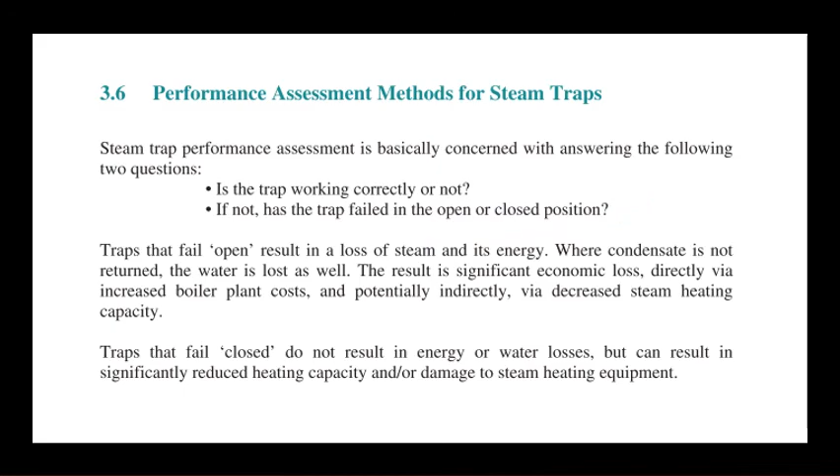Now there are different types of testing which can be done to check whether the traps are performing well or not. In the exam, they ask you to name the three types of testing done to assess the performance of the trap, or whether it is working or not. They may ask you to only name the types of testing, or to explain them, or they may give you the names straight away and ask you to briefly explain the testing method, friends.

So the first one is visual testing. By the name you can understand that you do the testing of the steam trap with the help of your sight, friends. With your expertise, you can sense whether the steam trap is properly working or not, and find out the problems in the steam trap. But it's not so efficient a method, because it doesn't give you a concrete result, and it's not feasible enough to rely on this type of study alone, friends. It's a part of the method where visual testing is used to identify the performance of the steam trap, or whether it is damaged. So visual testing is one of the methods. Everything is written here, you can go through and understand it yourself.

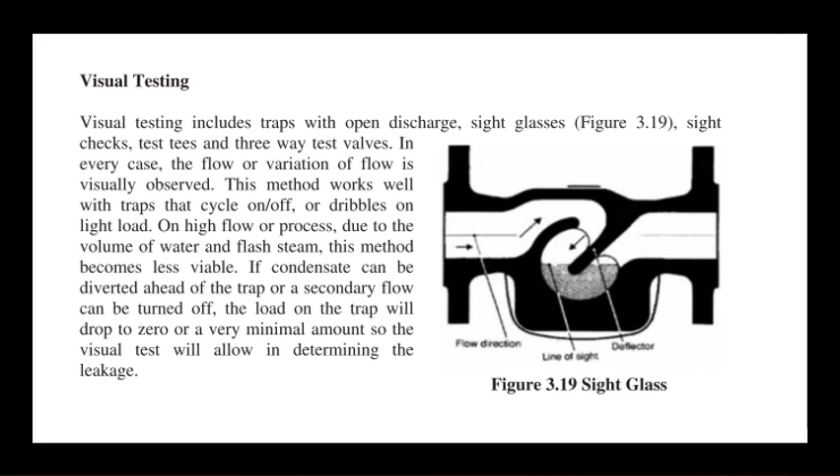This is another type of testing, friends: the sound testing method, by which you can also check whether the trap is performing well or not, or if it is damaged. Sound testing includes ultrasonic leak detectors and other equipment to check whether the trap is performing properly, or whether it is damaged completely. A lot of industries use this method to check the performance of steam traps. The explanation is given here, you can go through and understand yourself. In the exam, if they ask you, you must be able to briefly explain the sound testing method and the visual testing method explained in the last slide.

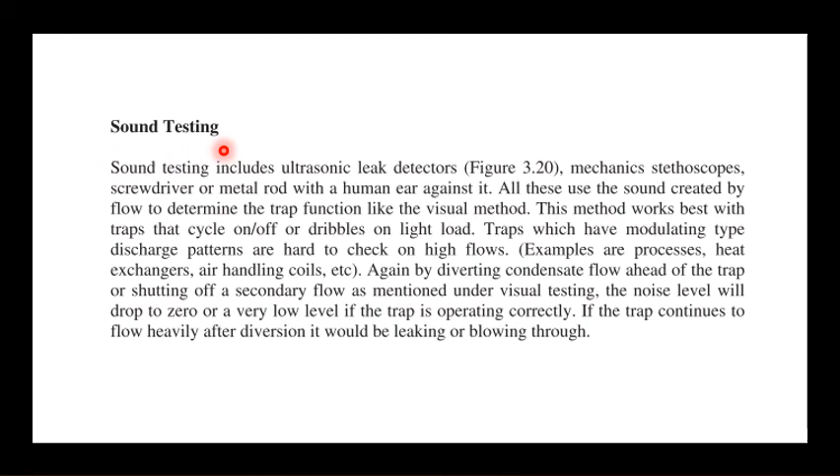This is another type of testing, friends, called temperature testing. Basically, you use a temperature gun, or infrared testing equipment, to check the temperature of the steam trap from outside, or the outlet side of the trap, and then analyze whether there are leakages going on inside the steam trap. So you can easily perform the assessment of the steam trap, whether it's performing well or not, or if there is a gap or damage, with your expertise.

So this is the third type of checking or performance checking of the steam trap. The visual type is one, second is the sound type, third is the temperature testing method. These are the three methods used to test the performance of steam traps, to know whether the steam trap is performing well or not, or if it is damaged. These things have to be analyzed using these three testing methods, friends.

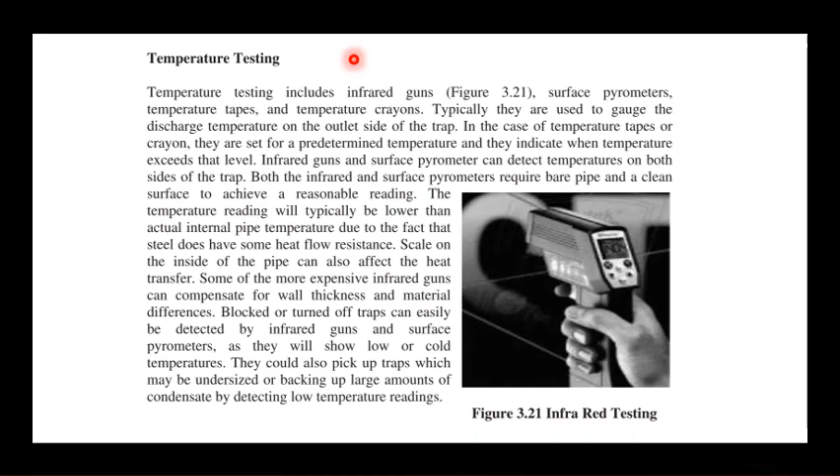Now coming to efficient steam utilization and energy saving opportunities. There are different types of methods, or saving opportunities, where you can use those applications and save a lot of energy in the steam distribution system, friends. The first thing is the monitoring of the steam traps.

That's what I said in the last slides also. Steam trap assessment and monitoring is very much important from the energy conservation point of view. If you want to conserve energy, you need to regularly monitor the steam traps, whether they are performing well, if there is any damage inside, or if you need to replace the trap. All this has to be analyzed and continuously monitored, and if any damage is there, or performance is not as per standard, you have to replace the steam trap accordingly. So this is the first energy saving opportunity: to monitor the steam trap on a regular basis, friends.

Suppose there is continuous steam blow and no flow indication - this means there is a problem in the trap. You need to analyze the steam trap from time to time. A step-by-step analysis is required, and you need to observe the discharge from the trap to understand whether it is performing well or if any problem is there. If continuous steam blow is there with no flow indication, some problem is happening inside the trap, and that has to be analyzed to conclude whether to change the trap or not, because otherwise a lot of energy losses will occur. Proper step-by-step analysis will lead to concrete action, and then you can save a lot of energy. This is the second energy saving opportunity in the steam system, friends.

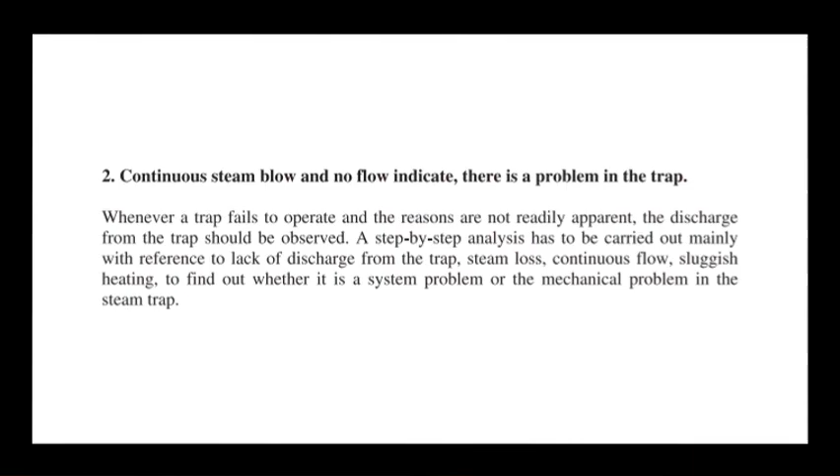The third energy saving opportunity is avoiding steam leakages. You need to take care that there is as minimum as possible steam leakage in the steam distribution system, friends. Steam leakage is a visible indicator of waste and must be avoided. Any leakage happening on the equipment side, or the steam distribution side, has to be curtailed or addressed, and you need to keep in mind minimum steam leakages should happen inside the plant premises, friends.

It has been estimated that a 3 mm diameter hole on a pipeline carrying 7 kg per centimeter square steam would waste 33 kl of fuel oil per year. You can see how much steam can be wasted with only a 3 mm diameter hole on a pipeline. You need to address all the holes, all the leakages, wherever they are. Avoiding steam leakages will lead to a lot of energy saving for sure. This is the third opportunity for energy saving or energy conservation in the steam distribution system, friends.

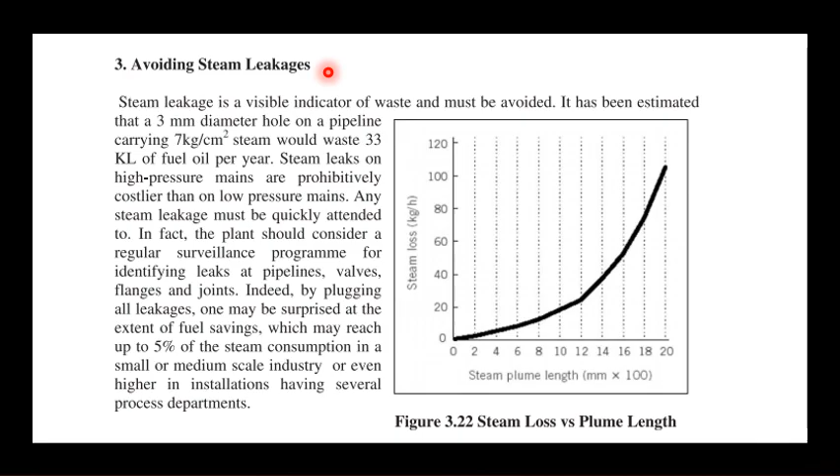Now the other opportunity is providing dry steam. You should consider dry steam for the process, not wet steam. If you use dry steam, you'll have a lot of energy saving potential. Best steam for industrial process heating is dry saturated steam. So you must keep in mind that the steam used in the processes should basically be dry saturated steam.

The wet steam reduces the total heat in the steam. So basically if you use dry steam, you'll have more energy conservation opportunity. This is the fourth type of energy conservation measure that can be taken to save energy, friends. Providing dry steam for the process is the fourth energy conservation opportunity in the steam distribution system.

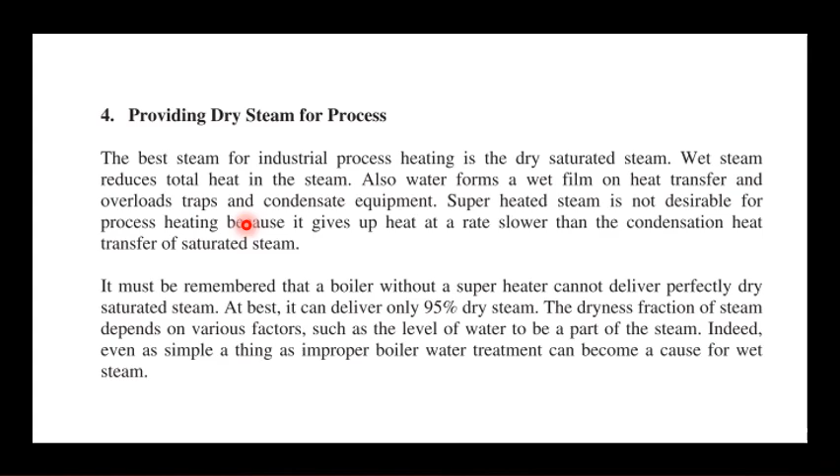Now the fifth energy conservation opportunity in the steam system is utilizing steam at the lowest acceptable pressure for the process. What is to be understood here? As a guide, steam should always be generated and distributed at the highest possible pressure, but utilized at a low pressure.

So if you generate the steam, you can generate it at a higher pressure and also distribute it at a higher pressure. But when you are going to utilize it in the process, keep in mind to have a pressure as low as possible, since it then has higher latent heat. So latent heat will be utilized in a better way if you keep the pressure as low as possible. This is the fifth energy conservation opportunity inside the steam distribution system, friends.

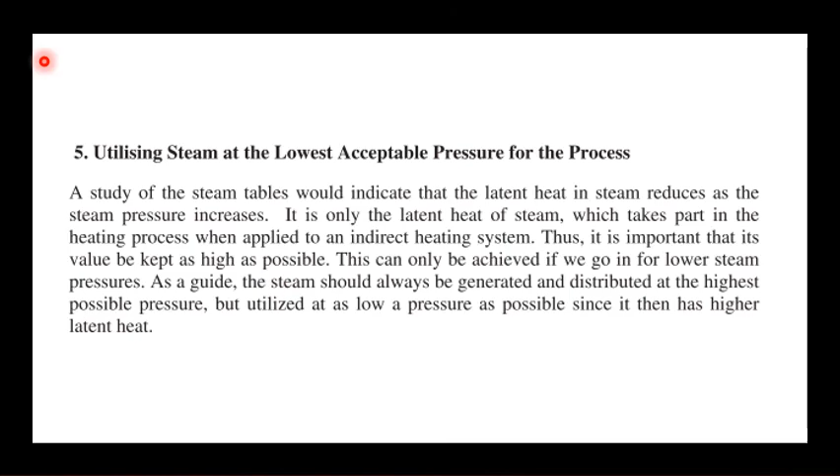So the sixth point is the proper utilization of directly injected steam. Basically, any liquid that you want to heat, you can directly inject steam inside it and heat the liquid in a very efficient manner. In this case, the only problem is that the liquid should not be diluted by the steam. So steam should not mix up with the liquid.

So in processes where dilution is not a problem, heating is done by blowing steam into the liquid. So any liquid where the steam will not mix with it, you can use steam directly, injecting it straight away to heat the liquid. Heating of a liquid by direct injection of steam is often desirable. For processes where dilution is not a problem, you can use this method to heat the liquid, and it's a very efficient method where a lot of energy can be conserved.

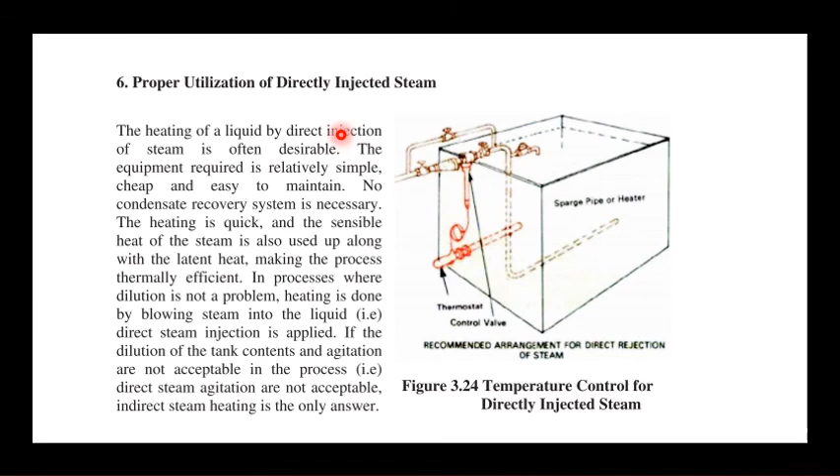Because you're directly injecting steam inside the liquid, you need not use any other mechanism here for heating it. So you can see that proper utilization of directly injected steam will help you save a lot of energy, friends.

Now the seventh point is minimizing the heat transfer barriers. You can already understand this from the name itself, so I'm not going to explain it in detail. You can understand by the heading that you have to minimize the heat transfer barriers. Any barrier that prevents proper heat transfer will really lead to loss of energy. So if you want to save energy, the heat transfer mechanism should be the best possible.

And any barrier leading to problems in heat transfer has to be minimized or curtailed. So minimizing the heat transfer barriers is an efficient way to save energy. If you want to save energy, make sure that you have the minimum heat transfer barriers.

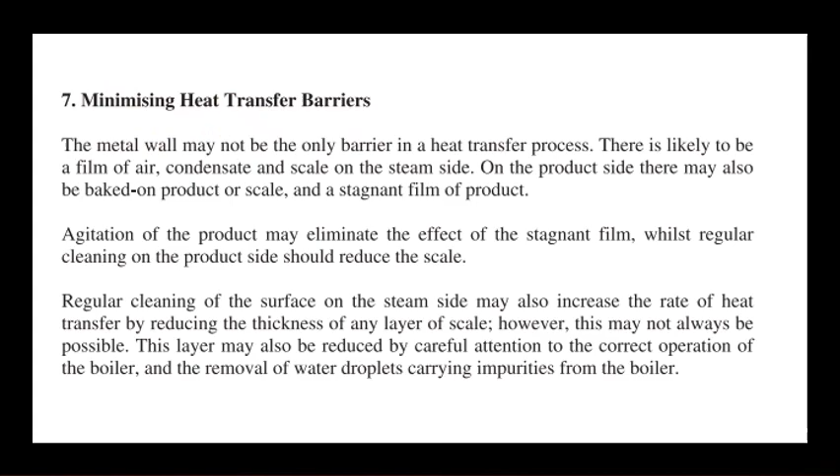So the eighth point for energy conservation measures can be proper air venting. Any air mixed with the steam will really lead to more energy consumption. So if you want to save energy, proper air venting is very much important. You have to remove any air present in the steam system — that's called air venting. This is the eighth point to be discussed here.

And the ninth point is condensate recovery. Any condensate that you have should be recovered and can be reused to preheat the water, or you can say the feed water. This is one aspect where you can save a lot of energy if you recover the condensate and use it to preheat the feed water. So condensate recovery is another important point for energy conservation in the steam system, friends.

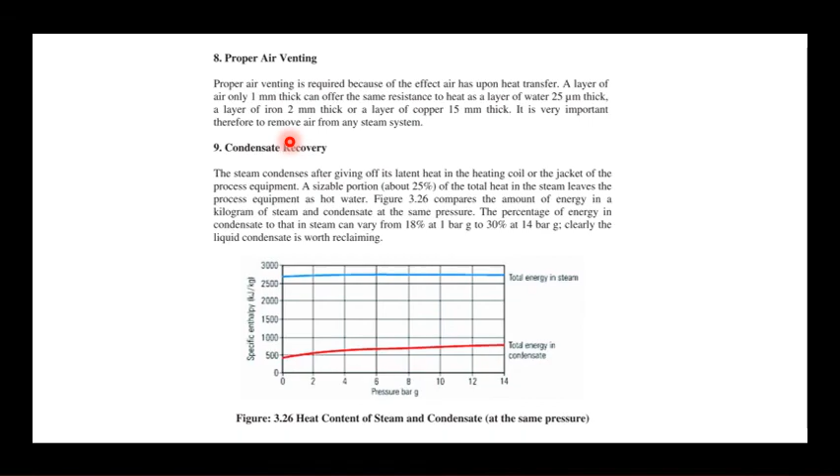The tenth point is the installation of insulation on steam pipelines and hot process equipment. You must insulate all the steam pipelines and hot process equipment as much as possible, such that there is no loss of energy. This can save a lot of energy, making it a very useful point from an energy conservation point of view. So this is the tenth energy conservation opportunity in the steam system, friends.

The 11th point is flash steam recovery. Flash steam is produced when condensate at a higher pressure is released to a lower pressure, and it can be used for low pressure heating. This is also an important opportunity for energy conservation in the steam system, friends.

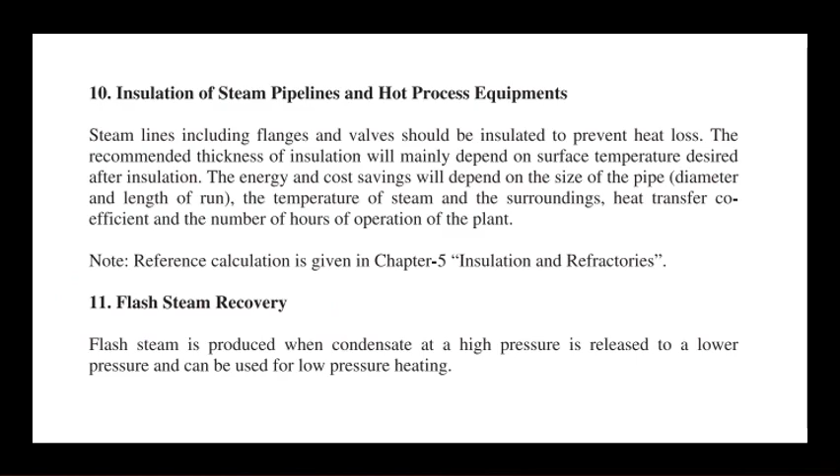Another important point is pipe redundancy. This means any pipe which is no longer needed can be removed from the steam distribution system, friends. This will lead to a lot of energy saving. This is a very important point to consider from the energy conservation point of view. So this is the 12th energy saving opportunity in the steam system.

13th, reducing the work to be done by steam. Wherever steam is required, use it there only; otherwise, if it's not required, you can use other mechanisms to cope with it. Steam should only be used where it is really required, because it's a costly affair, and any steam leakages or maintenance issues lead to a lot of economic impact on the company. So wherever possible, other mechanisms can be used instead of steam, and steam should only be used where necessary.

Reducing the work done by steam is very important, because if steam usage is not feasible in a certain area, you can save a lot of energy by avoiding it there. So this is the 13th point for energy conservation, or the energy saving opportunity, in the steam system, friends.